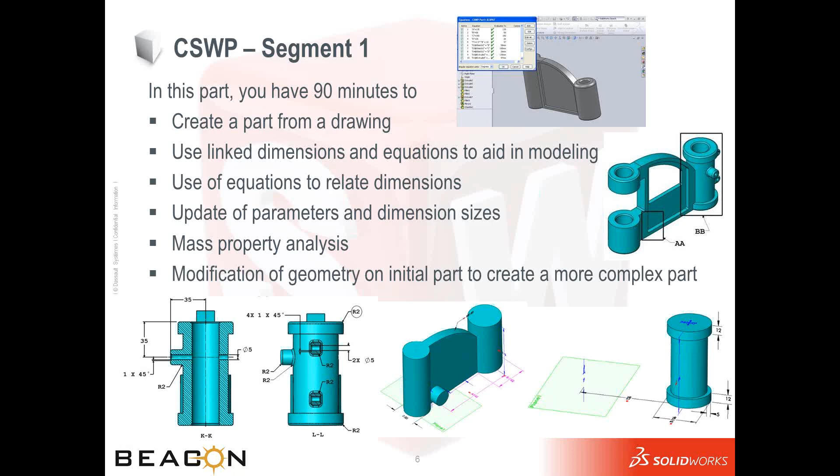So if your answer is more than 1% off, I recommend you go back and verify your modeling approach and all the dimensions and features. That's about segment number 1.

Segment number 2. This is a small exam, only 40 minutes long, and it will focus on configurations. I think most of the exam is about configurations and design tables. If I have to sum up segment 2 in two words, that would be configurations and design tables.

In this segment, they'll ask you to create configurations from a base configuration, how do you switch between configurations, how do you suppress features or add features across configurations, and then again they'll ask you to calculate the mass or center of gravity to verify your answers.

For those of you who are not using configurations, it's very important that you're not just familiar with it, but very comfortable with configurations and design tables. Make sure you have Microsoft Excel installed on your system before you attempt segment number 2, because design tables use Microsoft Excel embedded spreadsheets. So you need to have Microsoft Excel - that's one tip, or precaution, I can throw out.

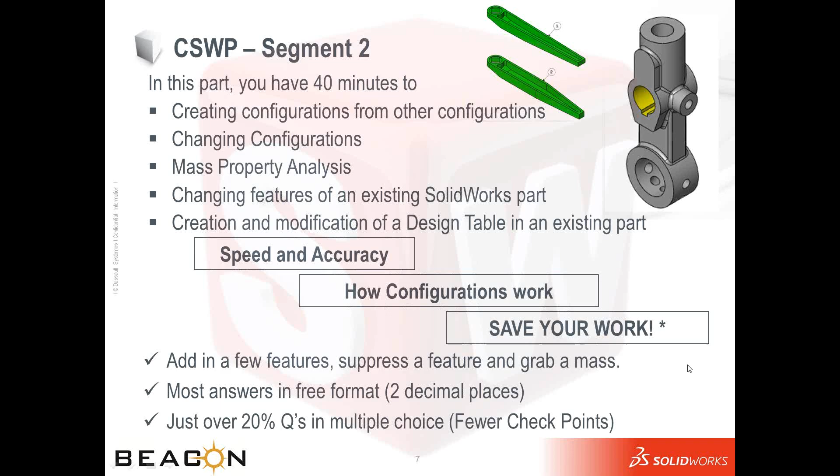Segment number 3 is all about assemblies. You'll be asked to create a part - I think a very basic part modeling exercise to start the segment - and then they'll give you some components that you have to download and create an assembly out of. The skills you need here are basic assembly modeling skills. You need to be familiar with the mates, not just the basic mates, but advanced mates like the width mate or maybe a hinge mate. So just brush up your mating techniques before you take this exam, and you need to use features like interference detection, collision detection - all this basic assembly modeling skills, I would say.

One more important thing is you need to be aware of how to create a coordinate system inside SolidWorks. There will be a default coordinate system, and SolidWorks will ask you to create a new coordinate system and place it somewhere on one of those components, so that the answers will be like calculate the center of gravity with respect to the new coordinate system you have created. So this is very important - everybody should know this.

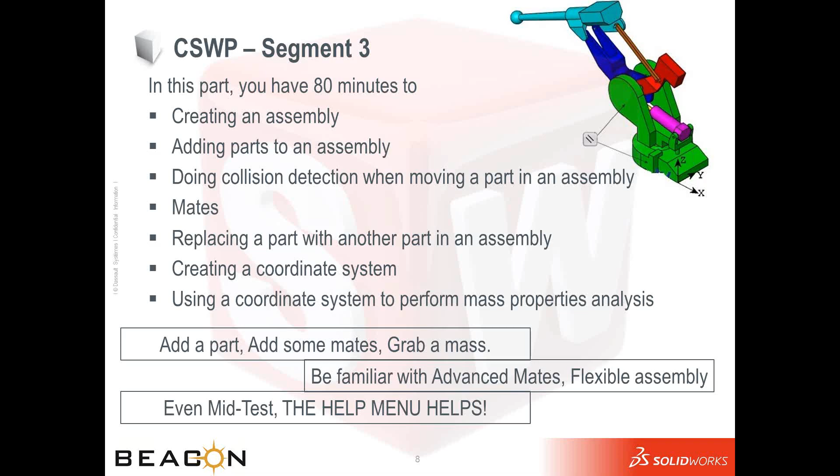One important tip I have here is, even in the middle of the exam, the help menu always helps. If you are in doubt, just open the help menu and it will definitely help. But again, at the same time, you have to keep in mind that there's a time constraint, and you need to be really quick and accurate - that's how you beat the exam. So that's about segment number 3.

I have compiled a list of best practices that you need to follow during the exam. This is an exhaustive list - I'm not going to go through every single one of them. What I'm planning to do is share this document with you so that you can go through it on your own. I'll just go through some of the important ones.

There is a sample exam available on the SolidWorks website. I'll show you where to download it from. What I recommend is, simulate this exam before you take the real one, in a test-like environment where you sit down in front of a computer and do the sample exam. If you get everything right, then take the SolidWorks CSWP segment 1, or go back and look into areas where you went wrong. Maybe you need more practice. So there's a segment sample exam.

If you're able to finish this sample exam within the time mentioned, I think you're all set with segment number 1. Unfortunately, there are no sample exams for segments 2 and 3. So I think what you can do is, with the help of the information I'm giving out today, go and practice topics like configurations, design tables, advanced mates, collision detection, creating a coordinate system, etc. As far as deviation is concerned, it's more or less 1%. So don't expect SolidWorks to give you points if your answer is more than 1% off.

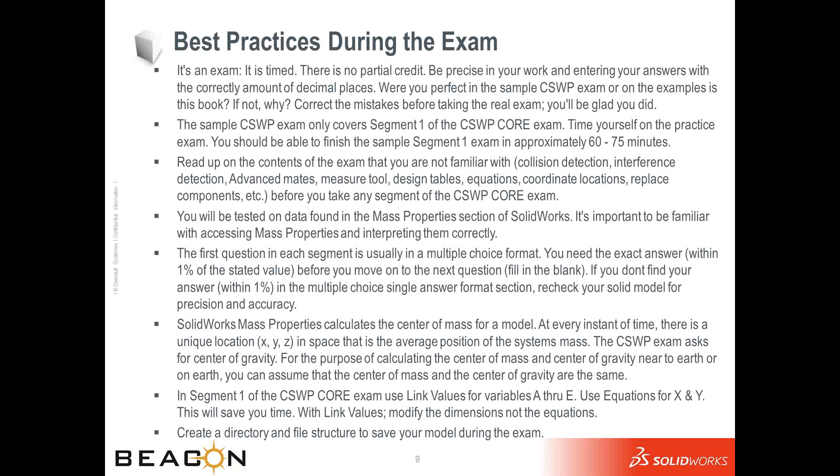Create a folder and save your work at different points. One more important tip: people always look for a workstation with high-end performance. I would say it's not at all required. Take this test on a system that you're comfortable with, you're familiar with, because that will have all your settings, mouse gestures, and shortcut menus already set. There's no point taking the test on a high-end system, because you won't be given a 500 or 800 part assembly—it will just be small component modeling and small assemblies.

Read the questions very carefully. These are obvious things that apply to any exam, but especially for this one since you'll be crunched for time. There are instances where I saw people not reading the question completely—they assume they know what's being asked and just go on to the modeling. Avoid doing that. Just read the question once, it'll hardly take a minute, and plan or prepare a strategy on how to attack that question before you go to SolidWorks. I'll show you how to do that.

One more important tip: don't use the images given on the system—don't take it for granted that they are to scale. They are not to scale. So if the dimensions you're given, and the final product you see on your screen, look completely different from the image they're showing, don't worry about it. That might be because of the dimensions, since SolidWorks uses variables and gives you values for A, B, C, D, and E that are generated by the computer. So don't worry if the image looks drastically different.

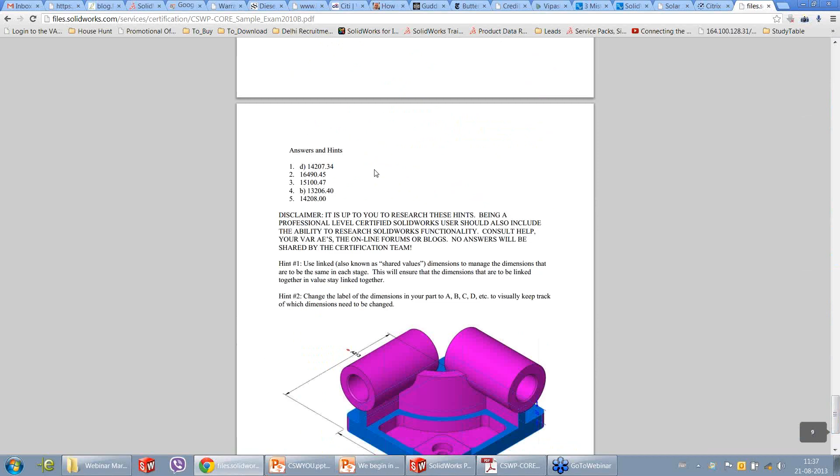So this is a sample exam that I want everybody to go through. Follow all these instructions, and when you finish 4 out of 5 questions correctly in 30 minutes or less, you should be ready, all set to take the CSWP exam. You have answers on the last page and some hints too, I think.

So what we'll do now is I'll take the sample exam and try to create the part using all the best practices, the right modeling approach. I've split my screen into two: on the left half we have SolidWorks 2013, and on the right I have the PDF document.

One more tip is, if you have access to dual monitors, please use that—it will be tremendously helpful, immensely helpful. At this point, since I'm sharing my screen, although I have a dual monitor, I want to show both the views and the solid drawing as well as the solid model at the same time. So this is the sample exam.

So they'll give you a bunch of views: front view, side view, top view, section views, even an isometric view. I think the isometric view really helps. And this is the question.

So go through the question. It says build this part in SolidWorks. They talk about the unit system, the decimal places, part origin is arbitrary. They talk about the material you need to assign, and they gave you some values from A to E, and F is a hole wizard detail, and there are two equations, X and Y.

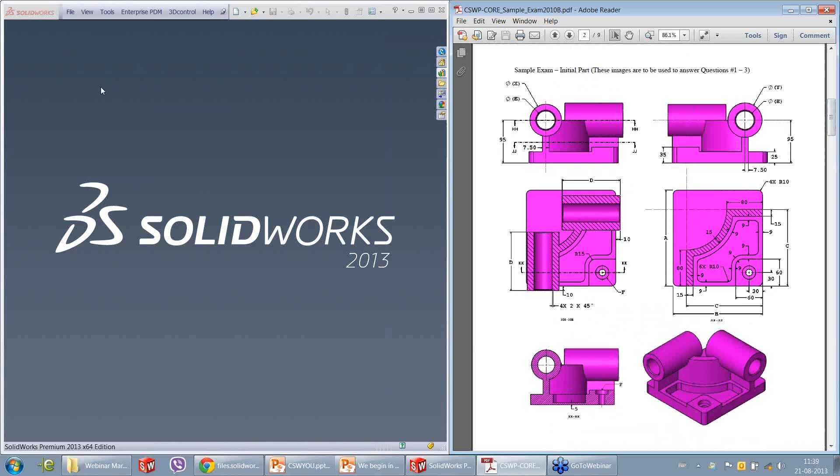So first tip is use templates. You saw the unit system was MMGS, so I have templates for different unit systems, so I don't have to waste time setting the units. Pick the right template and make sure that you are on the right unit system.

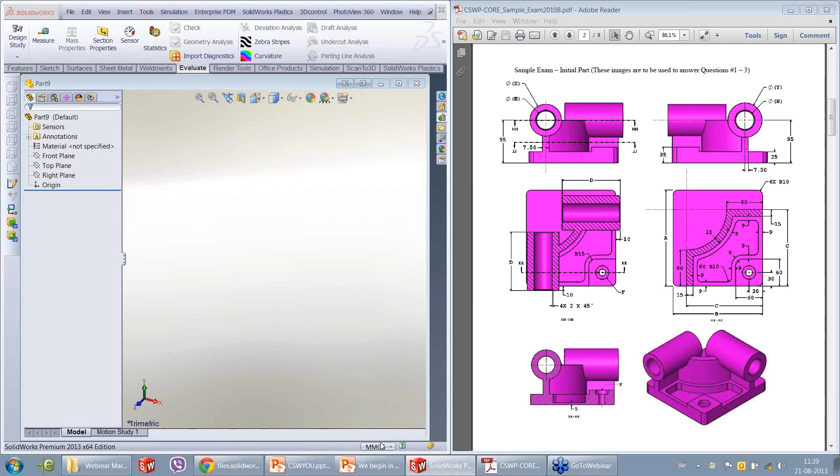Before I even start creating any sketches, what I'll do is go to Tools, Equations, and add some equations—basically variables. It's very easy to create variables. I'm going to create variables from A through E before I create the equations.

Don't worry about the units at this point—it's not really important because our global unit system is anyway in MMGS. So D would be 130, and the last variable E is 41. And now the equations.

There are two equations that you need to create. The first one is X is A divided by 3, and the next one would be Y, which is B over 3 plus 15. You can use parentheses here so you can see the evaluated values.

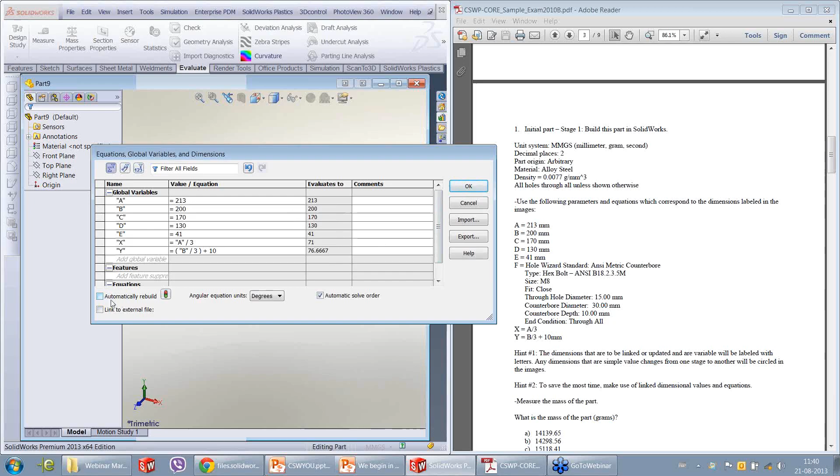I think it looks good. One more thing is, don't use this automatic rebuild—I'll tell you why, so make sure that is unchecked. Once your variables are added, I'll start sketching now.

I'll use the top plane. Basically I have a strategy to start from the ground up—I'll create this base plate and then add the detail later, like cylinders etc. I'll use a lot of shortcut toolbars.

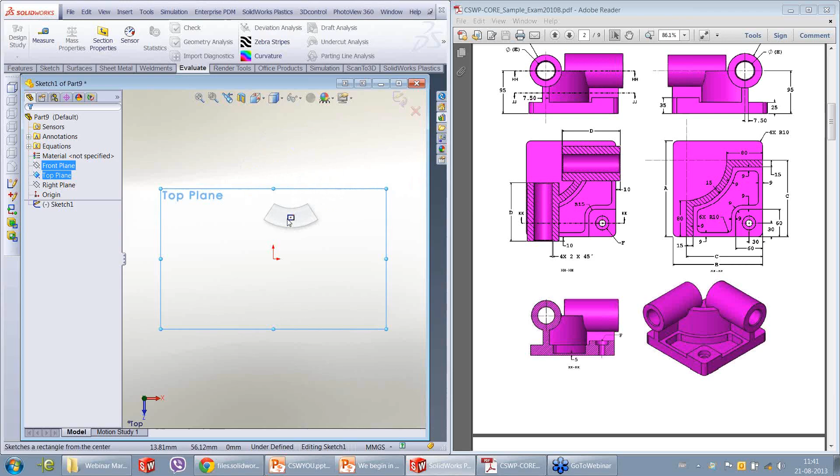Here I'm pointing out to you mouse gestures—this is one of my favorite shortcuts in SolidWorks. So create a basic rectangle and start dimensioning it. This would be A. You can see the detail is given as A by B.

So this is a basic sketch. You can add the fillets here, but I would like to do it using Fillet Expert. So what you can do is just extrude this to a depth, a height of 25, thickness of 25 millimeters.

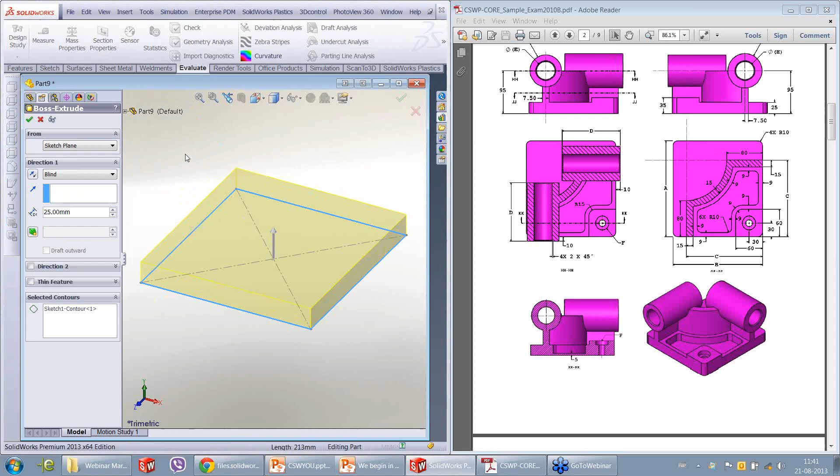There's some more detail that needs to be added, especially for this particular part, and I think it's better to add it now. I'm using a rectangle, but a different type of rectangle now, and I'm going to add an equal relationship and then dimension it.

This would be 60 millimeters, so this is a fully defined sketch. Before I get out, I would like to add a sketch fillet here of, I think, 15.

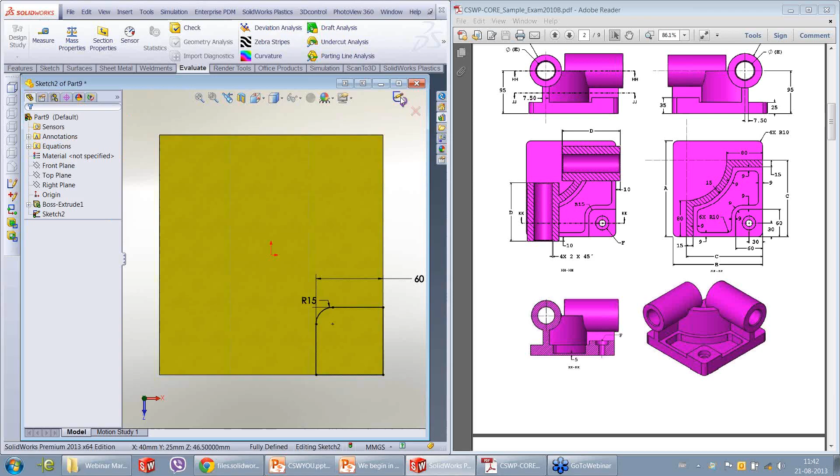So you need to check the dimensions in different views. And the thickness of this would be 10.

Now I'll use Fillet Expert to create these fillets, basically in 4 places. I'll use the SolidWorks contextual menus like Fillet Expert and the right mouse button to accept this. The next feature would be to create some...

I am using some construction lines and quickly dimension them, or rather position them. This would be C if you look at the views. This also would be C.

And I need some solid lines here, so again I'm going to go to my line command. What I'm doing here is creating 2 lines using the click-drag approach. There are 2 approaches: one is click drag click, and the other is click drag. This will save you one more step of hitting escape. The dimension of this line would be 80. I added an equal relationship, and I need a circle here.

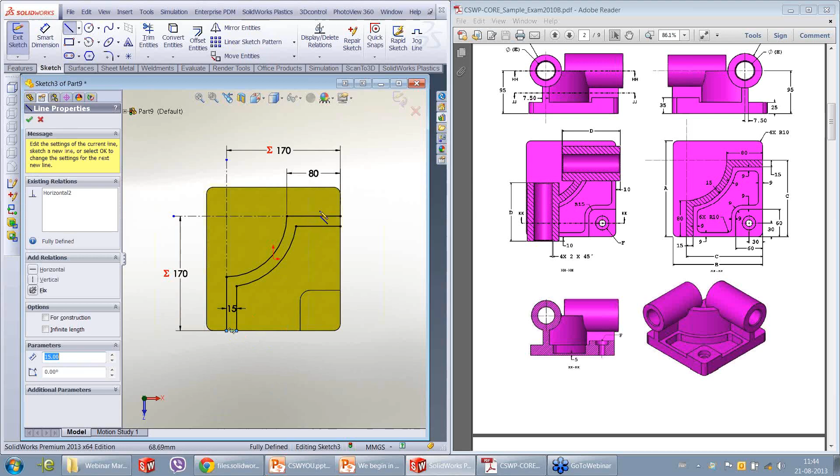At this point I want to use something like an offset just to save some time. The offset here would be 15 millimeters, and I have my select chain selected, and see how I'm using the right mouse accept. I think that's one of the easiest ways, the quickest way to accept and move on to the next part. So the thickness or the height of this would be 95 from the bottom, but we are doing it from 25, so you can just accept this.

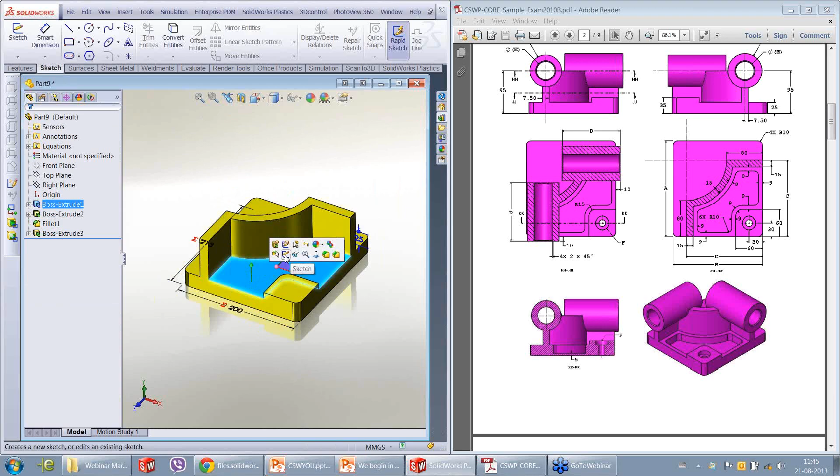Up next I need to remove some material here, so I'll just quickly create a sketch, and I need to create an offset, but the dimension is 9 and I want it to be reversed.

At this point I'll create some sketch fillets of 10 millimeters each at 6 corners. You can do this using Fillet Expert as well, it's completely up to you.

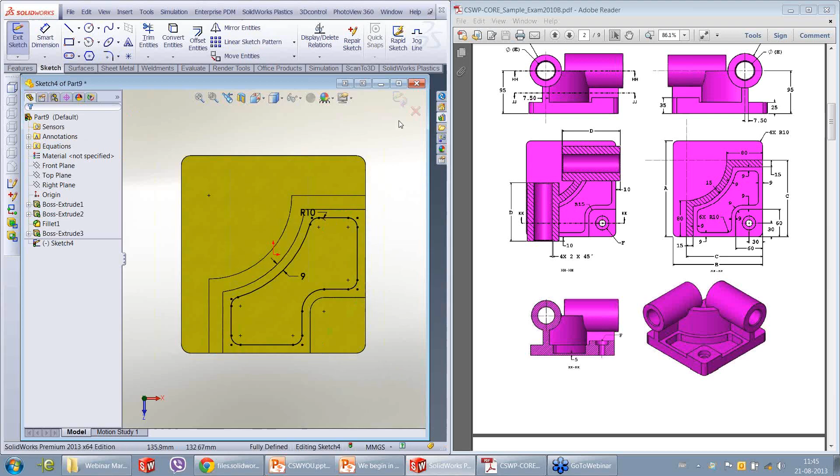And just remove this using cut extrude. I want it to go to, there's only 5 millimeters left, so 25 minus 5, that would be 20. If you are in doubt, just make sure that you're covering all the dimensions.

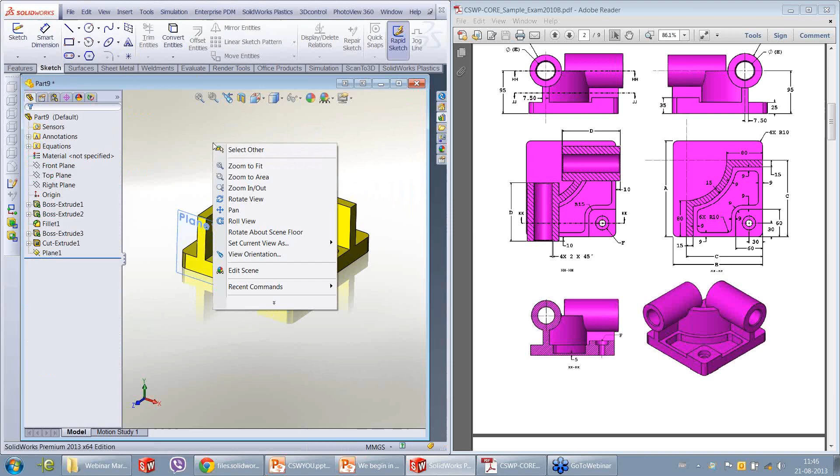At this point we're almost done except for creating these 2 cylinders. I need some reference geometry here, and I need to create one more. Here I'll use the recent commands menu instead of going and pulling down the menus. You can use the recent commands menu if you have used it already.

Create a new sketch, use mouse gestures to launch the circles and dimension it. This would be X. And extrude it - you don't have to come out of the sketch, you can directly launch the extrude command. This would be 130 millimeters, but we need to link it. That we're going to do. You can see that both the cylinders are dimensioned D, so we'll just edit the dimension.

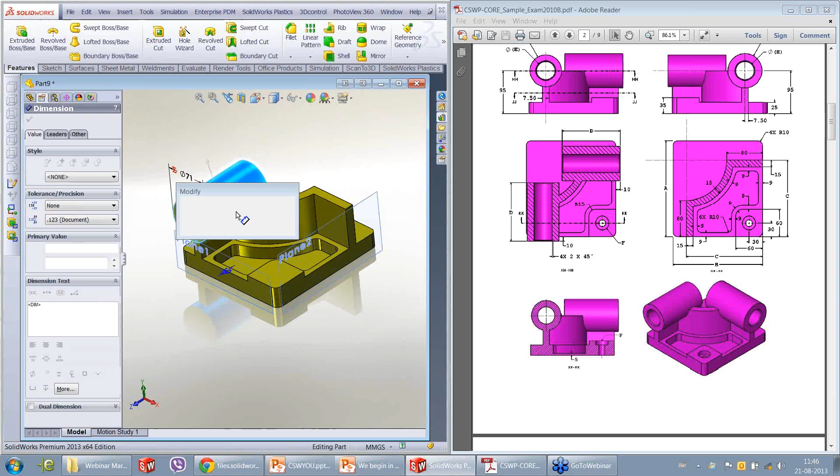And we'll create one more, or maybe first we'll remove the material here. I'll create one more sketch, wake up the center and dimension it. This time it's E, the ID is same for both the cylinders. And you can use the right click menus. This is a through all hole.

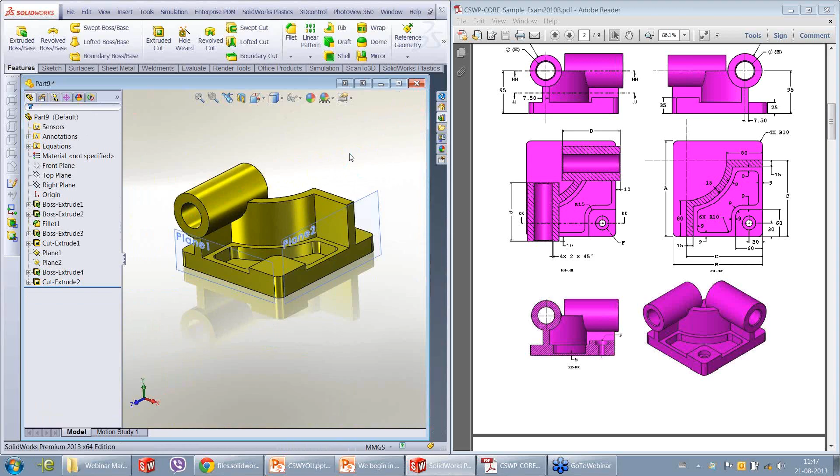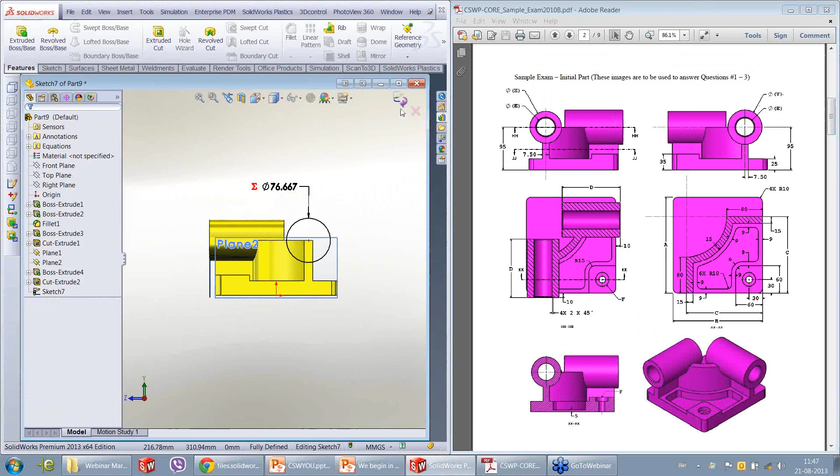And the second cylinder, similar approach, similar use of mouse gestures, dimensioning with smart dimension. This would be Y. If you're in doubt, just make sure it's Y and E. Extrude it to 130, reverse the direction and accept it. But make sure that you're linking it every time it is mentioned as a variable. Make sure you link it, because even if you miss one, your follow-up questions will be gone for a toss.

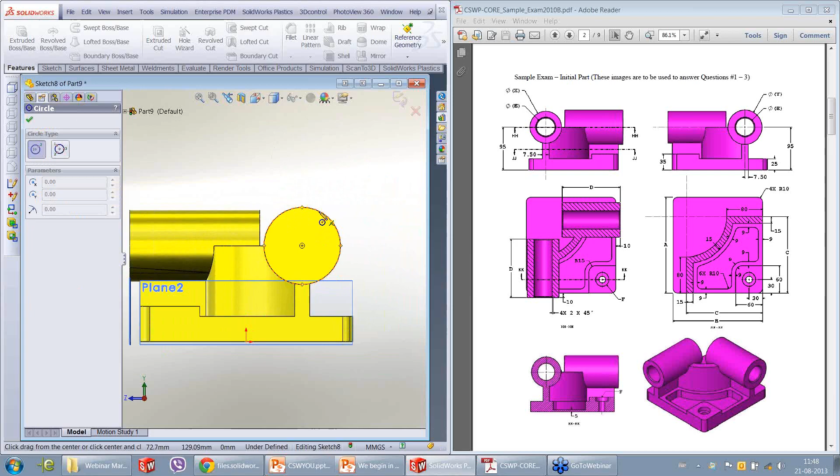Finally, we'll remove some material here. Wake up the center and dimension it to E. And make use of your shortcut menus to make it a through all. Accept it. And finally, we need to add some...

I think we linked it to the wrong dimension. This would be D. You can just rebuild it.

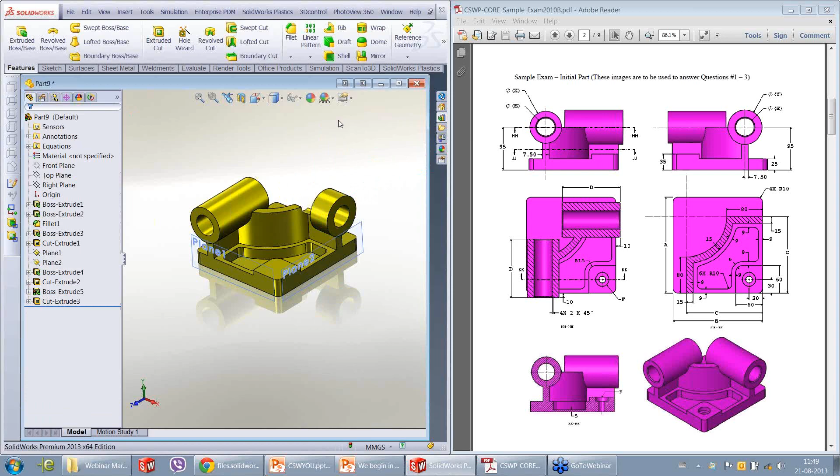There you go. And finally, we need to add chamfers. I don't need to see the planes now, I'm just quickly removing it, hiding it. And the chamfers are 2x45. So you can just select the chamfers, accept them.

And applying material, I have a list of favorites. So I have used the material here.

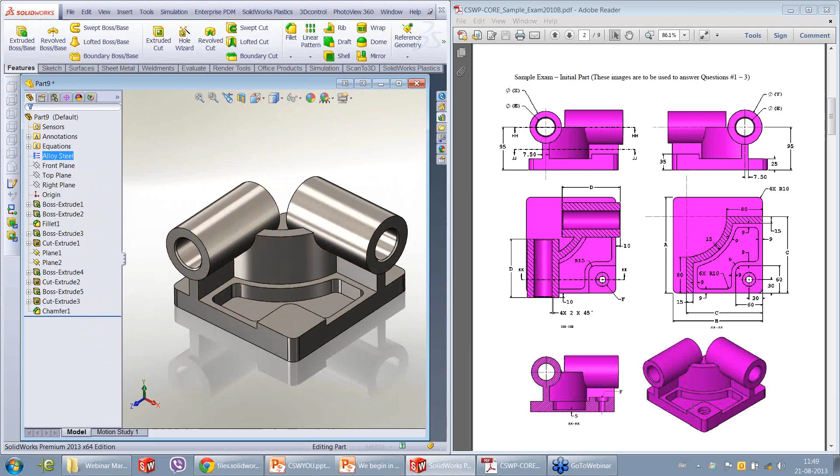And finally, I have one hole wizard to take care of this hole. So select the type of the hole, all the specs, even some custom sizing is asked for, and finally position it, a little bit off, and then I'd like to go to normal view and then dimension it. So these dimensions are, I think, 30 each, because our square was of 60. But when in doubt, always go back and check.

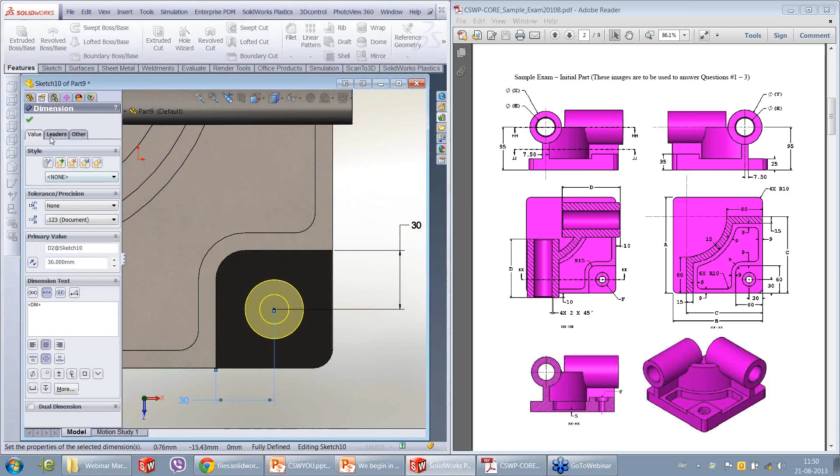Okay, so that's our hole wizard. And now just go to your evaluate tab to launch mass properties. And here you have your mass, 14207.35. You can just match it.

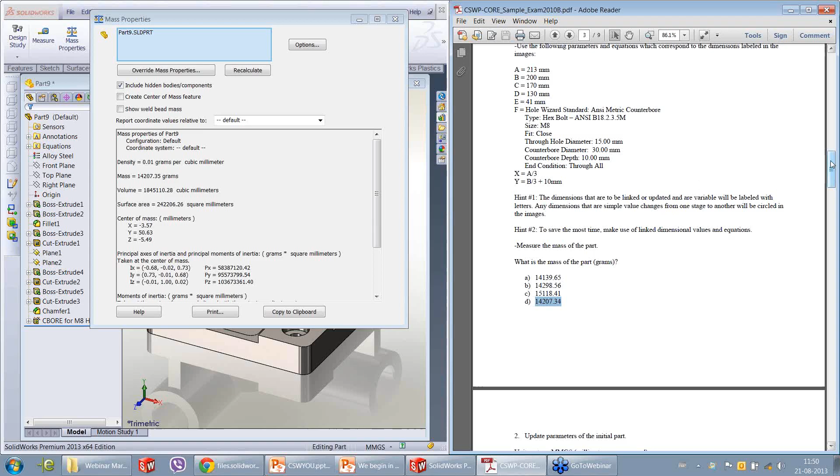So, 14207.34 - there's 0.01 grams difference, which is very negligible. You can move on to the next part, but before you do, make sure that you save it. Save it as something like Q1 or solution 1, and then go to the answer. I'm just showing the answers here - 14207.34, and we got 14207.35, I think.

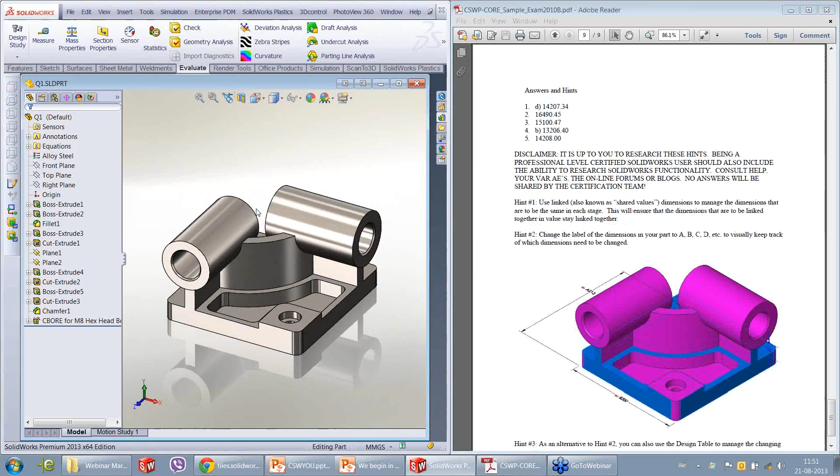Couple of other things I wanted to show - if you have to use a particular command and don't know where it is, I'll use command search. This is very helpful if you're using 2012 or above. You have this command search built into SolidWorks, so instead of launching different pull-down menus, you can use the command search to launch a command.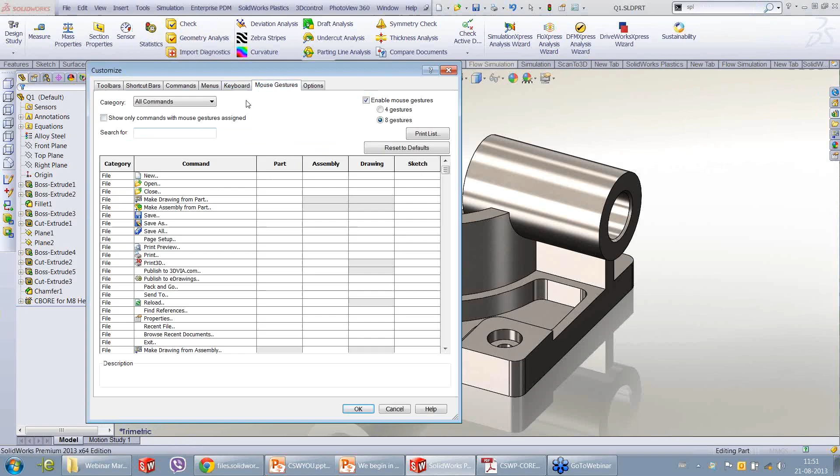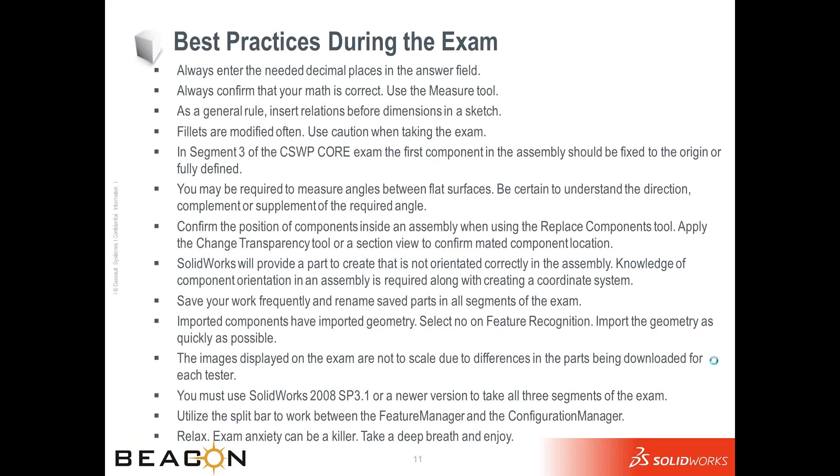I would highly recommend using mouse gestures and keyboard shortcuts. These are very, very useful to speed up your modeling or sketching process, even for assemblies. That's what I wanted to do - show you these tips and tricks to improve your speed.

So I used shortcut toolbars extensively, and I used mouse gestures throughout the process. Command search, I did not use, but it'll always come in handy.

This one is very useful - right mouse button accept. There are multiple ways to accept, click, or say OK when you're in a particular feature or command. SolidWorks will at times show you this icon, meaning you can just right click on your mouse and the settings will be accepted.

Use templates to make sure you're in MMGS or inch templates. Material favorites is again heavily useful - if you remember, I didn't have to go into the SolidWorks material library; I just right clicked and picked the material.

You can customize your command manager tabs. Use the recent commands menu - this is also very useful. And I heavily recommend using Xperts - SketchXpert, FilletXpert, all these Xperts. They're there for a reason.

FilletXpert is fantastic - you don't have to select all 4 different edges; SolidWorks will help you in those selections. SketchXpert - you saw when the sketch was overdefined, how I used it to help me fix the sketch.

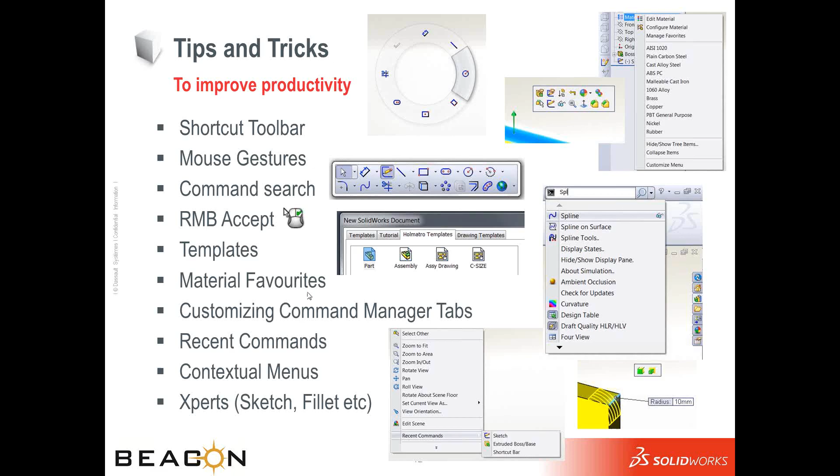This is the sample exam that I just worked on. Practice all these things, incorporate all these tips into your modeling techniques and approaches, and when you feel ready, take the CSWP sample. There is more than one CSWP sample - the one I have done is the latest. If you just look for CSWP sample, you'll get 2 or 3 different PDFs - one is 2008, one is 2010. You can use all of them to practice.

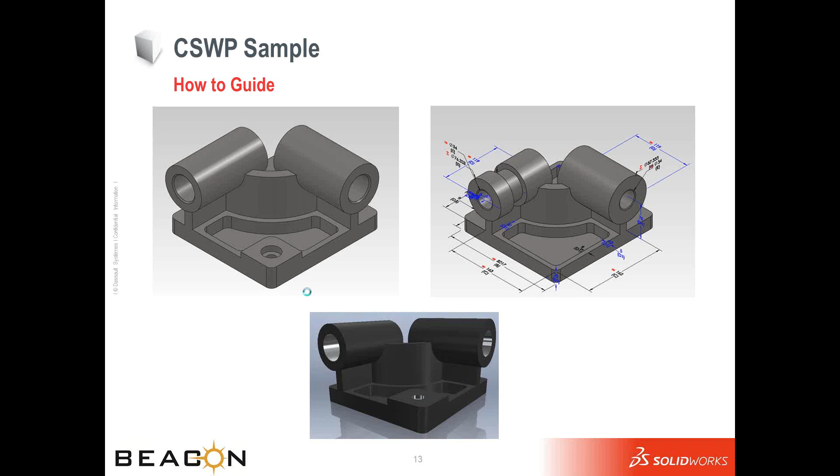A little bit about this certification process: when you register for the exam, you'll be asked to download a particular application called Virtual Tester by Tangix. When you download and install this, there are some settings - here I'm showing how to set English as your default language, and you need to create your virtual tester account.

If you are doing it for the first time, create an account with your first name, last name, company details, email ID, address, city, all these things. The reason is when you finish your certification, you'll get a directory listing - I'll talk about the directory listing also. So save your password, keep it handy for future use.

And event IDs - in the next screen, you'll be shown what exams you have purchased or are eligible to take. If you are a subscription customer of SolidWorks, you can approach your reseller or us for event IDs. We'll help you in generating these event IDs for you, and these event IDs will unlock the specific or relevant exam that you're about to take.